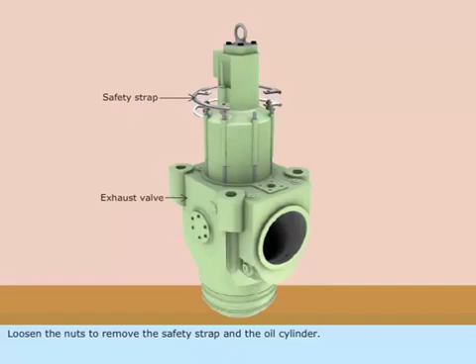To overhaul the exhaust valve, place the valve on a wooden platform. Loosen the nuts to remove the safety strap and the oil cylinder. Discard the O-ring from the air cylinder.

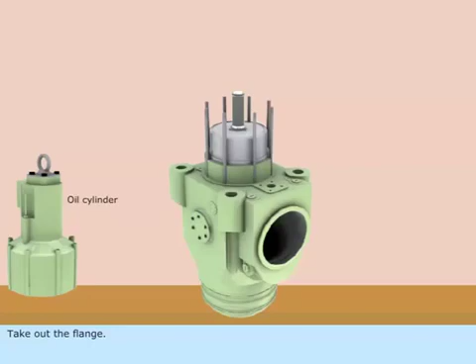Remove the 4 screws from the flange on top of the air piston. Take out the flange. Release the safety valve from the air cylinder for the air to escape below the piston.

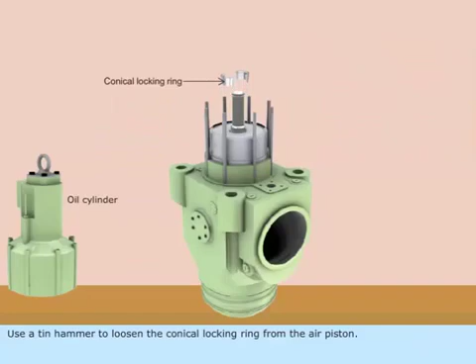Use a tin hammer to loosen the conical locking ring from the air piston. Remove the air piston. Lift the valve housing, clear of the spindle. Take out the air cylinder.

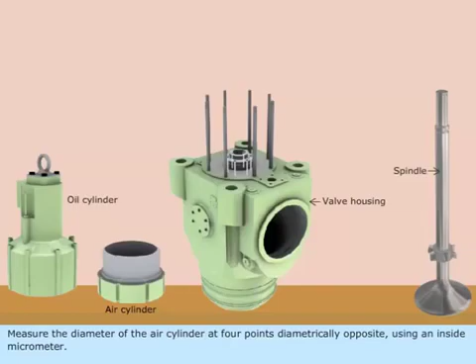Clean it and check the running surface for wear or possible scores. Measure the diameter of the air cylinder at 4 points diametrically opposite using an inside micrometer.

Remove the screws and dismount the flange of the stuffing box. Remove and discard the O-rings. Inspect the bushing in the spindle guide for wear.

Measure the inside diameter of the air cylinder using an inside micrometer. Unscrew and remove the lock screws which hold the bottom piece.

Lift the valve housing approximately 10 mm. Take out the valve seat using the tin hammer. Lift the valve housing and place it on a couple of wooden planks.

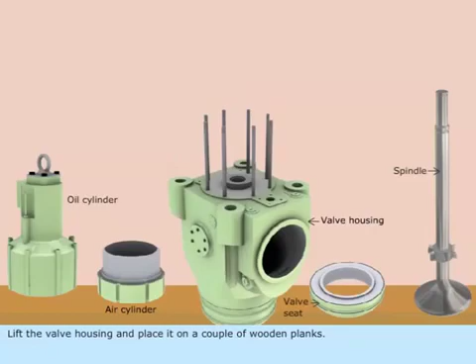Discard the O-ring from the groove onto the valve seat. Inspect the seating of the bottom piece for damage with a template for damage.

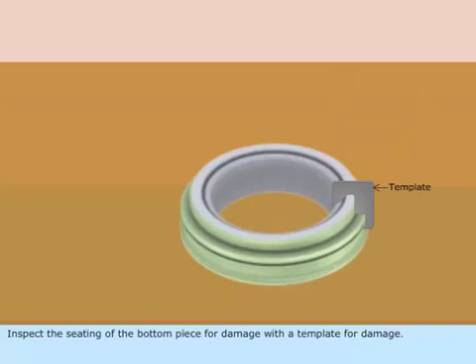Measure the clearance G3 between the template and the O-ring groove using a feeler gauge. Measure the clearance G2 between the template and the valve seat using a feeler gauge.

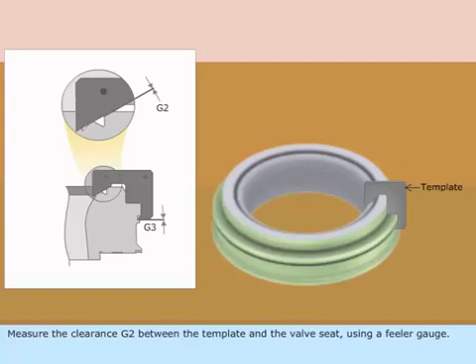Take and record the measurements at 4 diametrically opposite points on the circumference of the valve spindle.

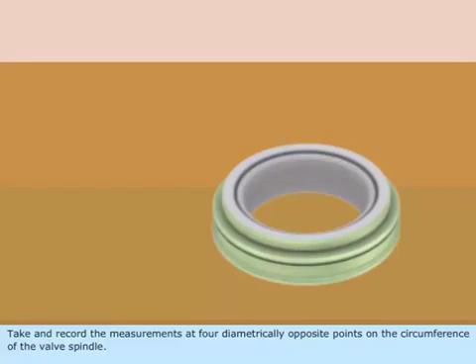Clean the contact faces on the spindle. Measure the gap between the spindle template and the seating of the spindle.

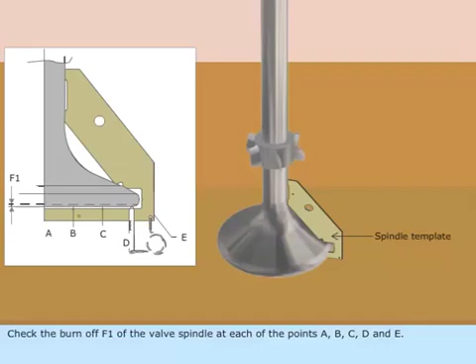Check the burn-off F1 of the valve spindle at each of the points A, B, C, D and E. The notches in the spindle template indicate the points.

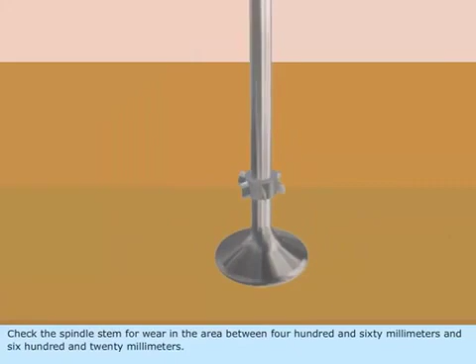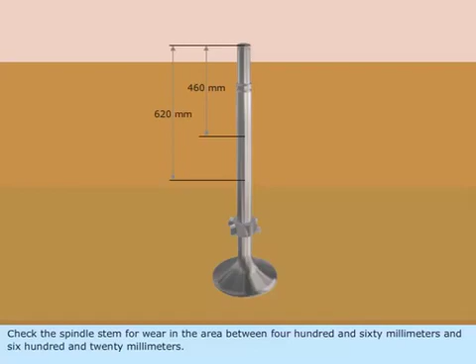Check the spindle stem for wear in the area between 460 mm and 620 mm, measured from the top of the spindle. Take and record the measurements at 4 diametrically opposite points on the circumference of the valve spindle.